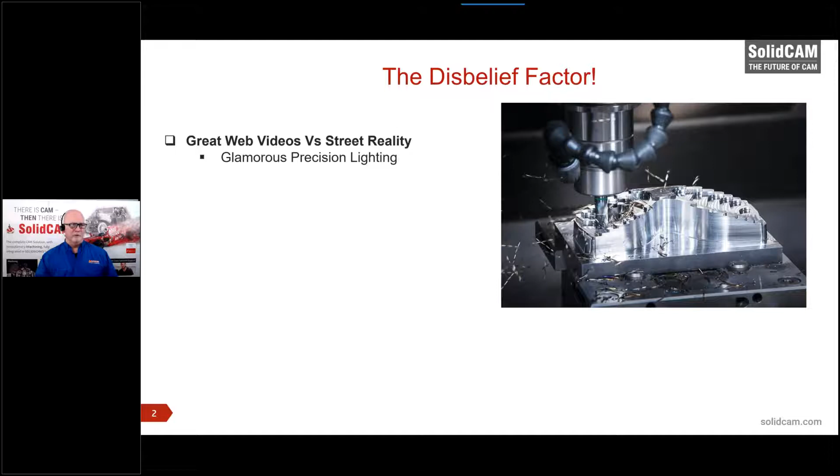Yeah, a little bit, because some of the things that I've seen, just from personal experience at trade shows and being involved in some of our sales presentations, these videos are fantastic. We've got a great team putting them together. I mean, they are some of the most beautiful videos you can imagine, and we run them at all of our trade shows.

We have them up on our big TV screens above our tower and everything. We call them our ambassador videos. The funny part is they've got beautiful lighting, everything is super clean, the parts are shiny, the tools are just absolutely in order.

The interesting part is people are looking at them, and I can't tell you how many times I've walked out and said, so are you seeing something you're interested in up there? And they're like, nah, it's marketing videos, I know it's not for real. Or they look at it and say, anybody can machine aluminum like that. There's just not a heavy belief factor. Some of that really amazes us, the consistency with which people just don't want to believe these videos.

Isn't that kind of what you see, Steve? 100%, Ken. You hit the nail on the head. If we've heard it once, we've heard it 100 times: oh, anybody can do that in aluminum.

And when we tell them that that's stainless steel, there's still that defense. They throw up the defenses, like, well, you probably sped up the video, or you maximized the machine and the rates and feeds and everything else to try to catch my attention.

It's the funny thing, we get accused of marketing. It's like, well, of course we're marketing, but we're marketing for real.

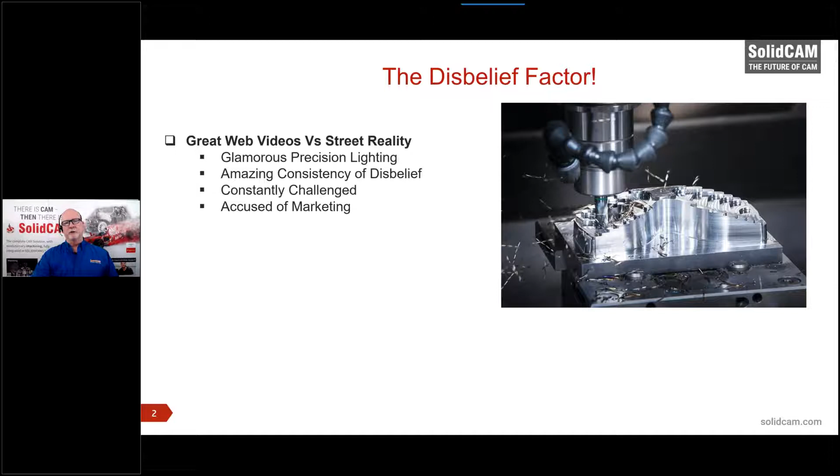But there's something about cell phone videos. There's a lot of different ways to do this, but the cell phone videos don't appear to be staged. Look at the vise in this thing, it's being held down by a couple of bolts and some flat washers. This is the kind of stuff you see in a real shop sometimes.

It's not what I would call good, but these are things that actually show up sometimes. The machine's not real clean, it's a grainy picture. There seems to be a little bit more street credibility.

And Steve, where do we get some of these videos? It's interesting, Ken.

If we're doing a training class, we'll pop out the cell phone video and take them on the fly as we're doing some training. And they really resonate. I'll go back to, hey, it might not be a state-of-the-art machine, but a lot of these customers aren't using state-of-the-art machines. So it really sparks off in their mind that, hey, this could be reality for my shop.

And so when we're talking with a prospect, or dealing with a customer that for whatever reason didn't buy iMachining to begin with, we use these really to help with that disbelief factor. It seems to be a little easier to understand, especially since you got to be careful with ones that you take in the shop.

A lot of times you'll get one from a customer or something like that, and, you know, shop talk - they may be using some expletives, so you might want to watch that before you present it to a new prospect. But you can trim and clip those out. It's pretty funny sometimes, but it's really cool because it's the customer's excitement that really comes across and begins to make things more believable.

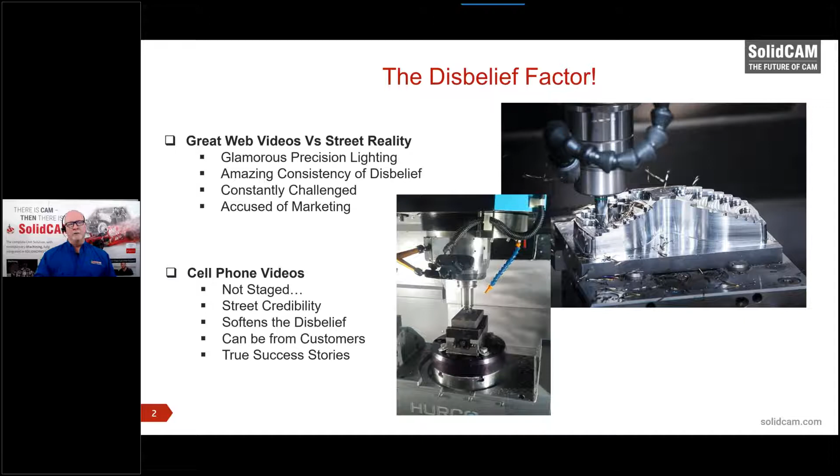So let's talk a little bit about who the customer really is. What is our customer base? Who are we talking to? Are we talking to the board members? Some people think that's the right thing to do sometimes, and those guys probably want to see those stylized videos, right, Steve?

100%. You really have to understand your audience in order to pick and choose the correct videos and marketing material. Time and a place for everything, Ken. Right, exactly. But I think most often, this is the crowd we're talking to: we're talking to the machinists, we're talking to the shop general managers.

This is their environment, okay? Their environment is generally not polished and pristine. So they tend to appreciate when we show them something that's actually real world.

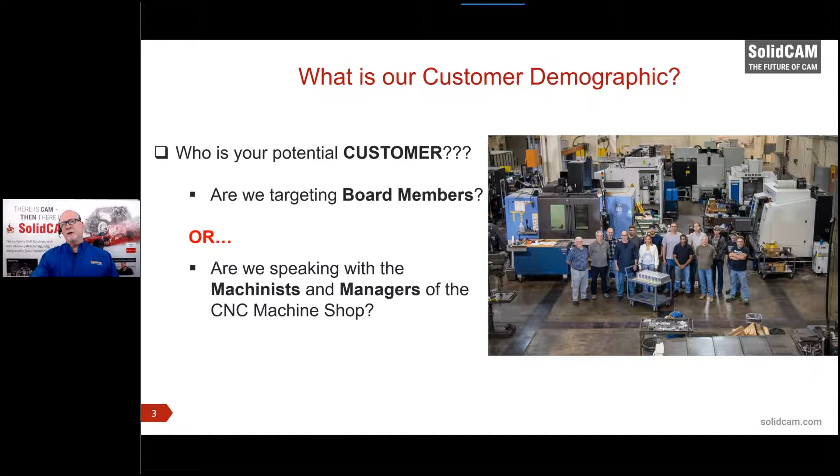And sometimes that means not using something that is super high performance. We have to fight off illusions all the time, and there are some real illusions in this industry when they see all of these videos, all super high performance, powerful machines. One of those illusions is that iMachining requires a super machine. Well, that's just not true.

This video here is one of my favorites. This is not real sexy, but let me tell you what this is. This is a TM2 open bed tool room mill from Haas. This thing is old and tired. This customer is one of our customers out in Denver, and that's where this video came from. We were on site, I was proving this out to him. The pocket you see over there on the left, he machined his way on this machine.

Now, this machine's only got a 4,500 RPM spindle. It can only run about 50 inches a minute before it runs into data saturation. But he's got a 3/8 inch end mill in there. In that pocket on the left, he could only go 50 thousandths deep at 2,200 RPM, 18 inches a minute, before it started just rattling this machine so bad that it would just chip up the tool. So that wasn't very functional for him.

So we did something a little bit different. You'll notice I'm all the way down at a full 1 inch here. Let's go ahead and bring this forward a little bit. You can see the chips being thrown off of this. Now, again, if you watch carefully, you'll see that we're kind of running up against that data saturation. There's still some pausing and hesitation in there, but I'm using everything this machine has got. It's got 4,500 RPM on the spindle, I'm using every bit of it. I've maxed out the chip thickness and the angle such that we're taking advantage of that 50 inches a minute best we can. Again, this is not something we want to show on an ambassador video.

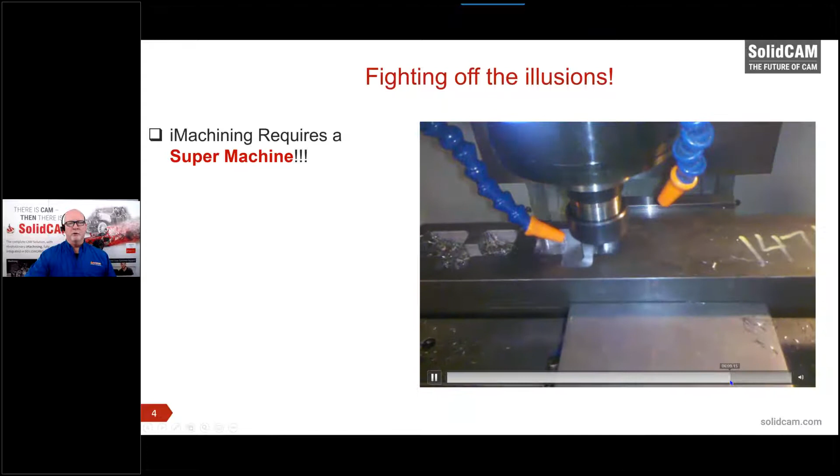But let's take a look at this. Here we are most of the way through it. Look at the chip color, still absolutely gorgeous. Now, something to know, in that pocket on the left, he would get down to the bottom of that pocket in 2 hours and 26 minutes. Remember, we're doing 50 thousandths steps at 2,200 RPM, 18 inches a minute.

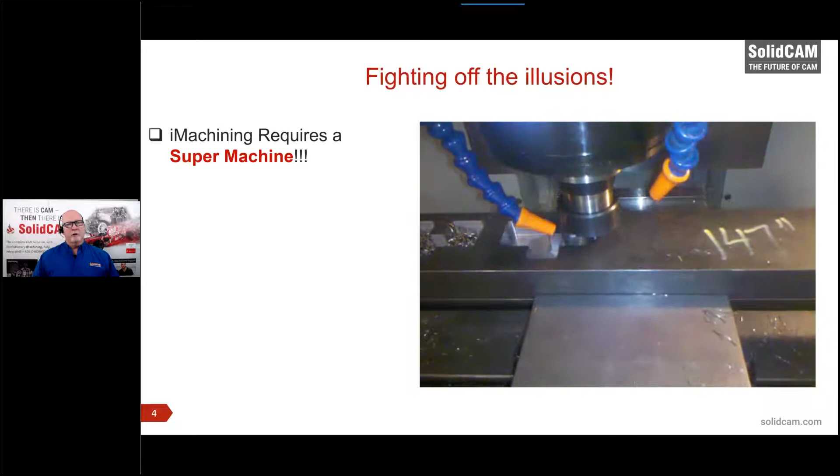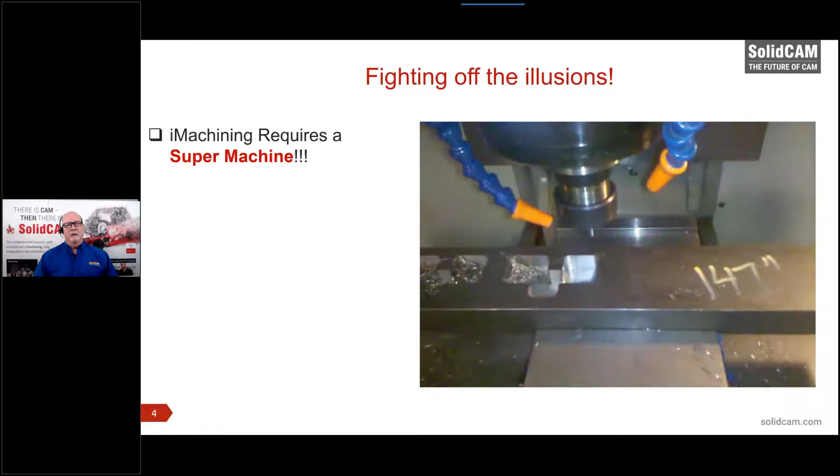So there's 20 steps in this thing to finish it. By the time he got to the bottom, that tool was shot. So he'd put a new tool in, finish the wall off, and he'd use that tool to start the next part. Well, take a look at this. Here we are, finishing up on this at 7 minutes and 25 seconds, and that tool lasted 10 parts. So that was a dramatic difference on an old, beat-up, weak machine that was in need of some service, quite honestly.

Well, Ken, and what we do on the sales side here is explain to customers that we maximize the productivity of each and every machine on the planet. It doesn't matter if it's a 4,500 spindle. Absolutely, 15, 20,000 K spindle for sure, you're going to get even better performance. But at the end of the day, not everybody has state-of-the-art equipment like this gentleman.

Well, and how many times, Steve, have we been talking to a customer about iMachining, and they say, yeah, I've seen your videos, but I don't have any machines like that. I don't have any high-speed machines, I can't use it. Yeah, it comes up all the time. Or maybe there's a machine in the back.

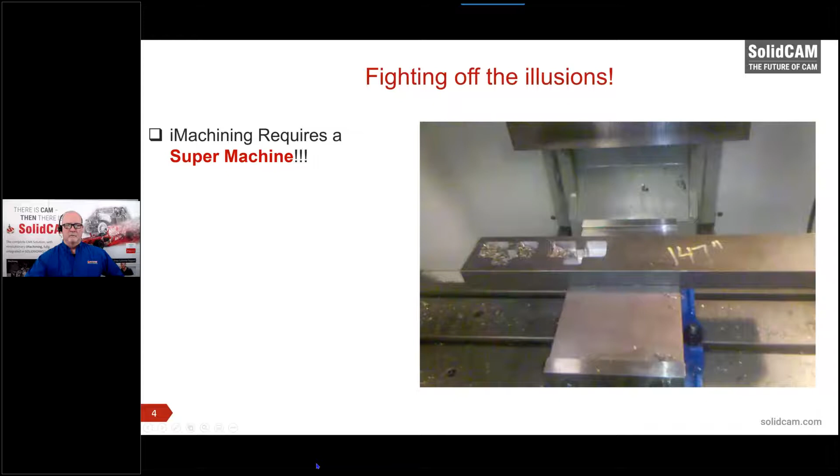Ken, we have had a scenario or multiple scenarios where people were looking at adding equipment to try to keep up with the workload. And we present iMachining to them. It can double, triple, quadruple the productivity of that machine, which makes them not have to buy that brand new machine. Right, so they really might be able to save on some capital investment. I can't stress enough the fact that iMachining maximizes the productivity of every machine on the planet goes a long way, and that resonates with people too.

So, well, another one of those illusions: we have to have super high performance tools to be able to do that. No, it's not true either. This is an AccuPro, an 1/8 inch AccuPro tool, running in a Haas VF2 SS, so it's a mid-range machine. It's got a 12,000 RPM spindle, but that 1/8 inch tool is going 1/4 inch deep in mild steel, and we're taking out an 1¼ inch square pocket out of the corner of this thing.

Now this is using their machine, and watch how this thing takes care of this business right here. We're really deep for that 1/8 inch tool, and this is just an AccuPro off the MSC catalog, one of the least expensive tools on the market. Look at the performance we're getting out of this thing.

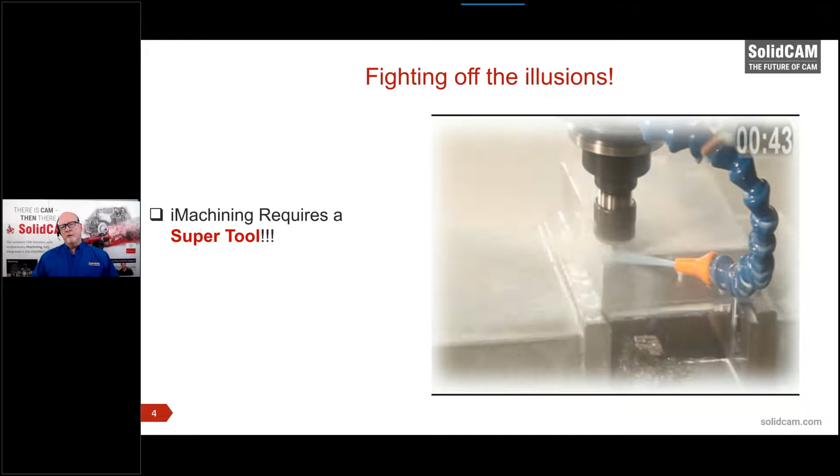It's absolutely stunning. Videos like this really meet the end user where they need to be. They go, yeah, I can do that on my machine with the tooling that I buy. A lot of times customers are used to buying big, huge end mills and trying to plow through the material. We get a lot of traction because of the intelligence of iMachining. Hey, Mr. Prospect, you can buy smaller, less expensive tools and get better results because of the way the intelligence built into iMachining manages that tool's engagement in the material at all times. So that seems to set off a light bulb in their head too - hey, I can buy smaller tools, get better results, and it's a win-win all the way around.

Absolutely. And another of those illusions we run into all the time comes right in there with that - the horsepower requirements. This is where we can really turn something upside down for these customers. It changes their entire mentality.

Most of you have probably seen this video. It's one of our favorite ones. We take this machine to trade shows with us sometimes. This is a little LaVille LMV 300 machine. That's only a 3.5 horsepower spindle on there. And we're in 1018 cold roll steel at 3/8 of an inch deep on a 3/16 inch diameter tool, so 2 times diameter deep again.

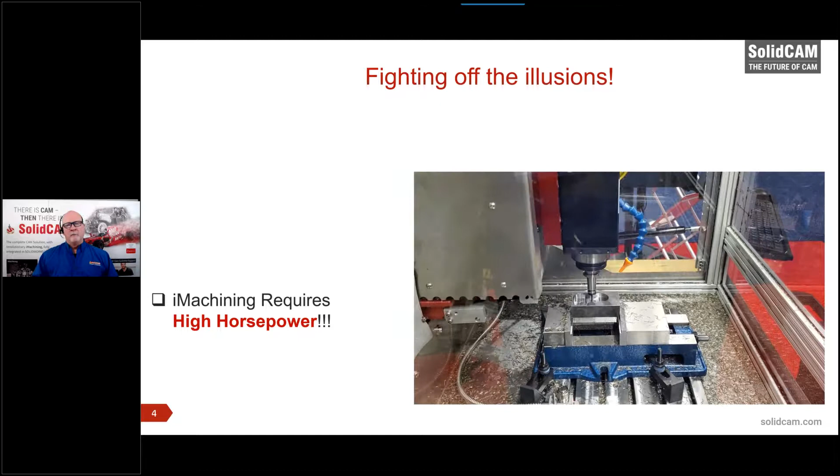But look at how, on this little bitty desktop machine with a low horsepower spindle - it's a fast one, we're running at 18,000 RPM right now - we're able to cut amazing with this. And we use this at trade shows to really bring that sense of reality to people.

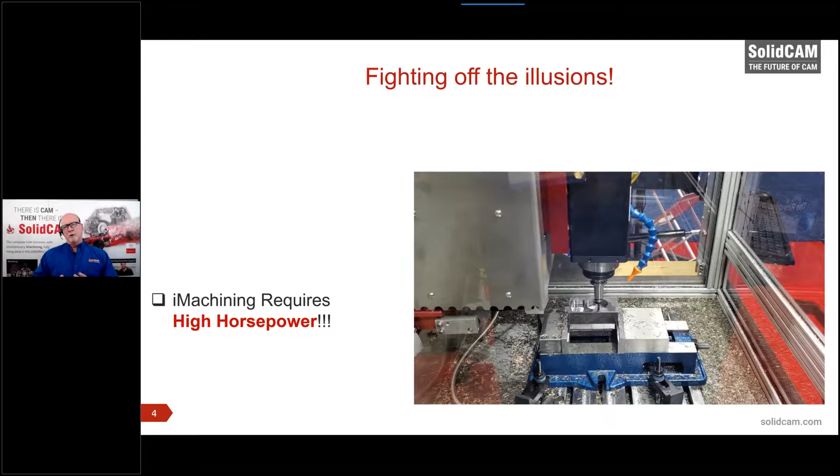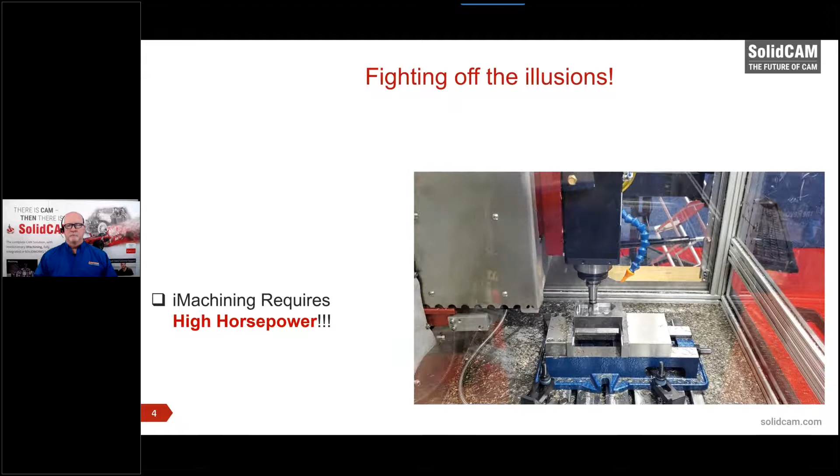Now, one of the things that's kind of always brought up is, well, yeah, but what about the customers that do have high performance machines? Steve, what do we run into with that? Well, being able to look at a machine like this, the light bulb goes off in their heads - holy cow, if I could get that type of productivity off of a small machine, imagine what I could do with my state-of-the-art gear. Exactly.

I was just going to say, this gives us a reason why we use a lot of these cell phone videos. This was at the trade show. We were setting up, and I just pulled my phone out and took a video of this as we were running it. It's not super fancy, but it's real. You can hear the sound of the cut, you can see the chips flying everywhere, and they get the sense of what's going on. Even being able to see outside and see, oh my gosh, this thing's sitting on carpet. Holy cow, you know?

Yeah, I was just going to say, Ken, I think there was a story about IMTS 2018. I can't remember if it was on the old machine we have, the retrofitted machine, or if it was on this one. But I know which one you're talking about. That was actually this machine. That was pretty interesting, guys. This is something that was kind of fun.

I was standing out in the aisle, and a group of guys came walking by. I could see who was the leader - it was obvious he was the alpha dog. So as he came by, I said, 'Hey, how you doing? You guys do any CNC machining?' And he looks over at me, looks up at our monitors and sees what we're doing up there. He goes, 'Yeah, we've got MasterCAM. We've had it for years. We don't need to see anything like you've got here.'

I go, 'Well, have you seen our iMachining?' They go, 'We got dynamic mill. It's the same thing.' I said, 'Well, no, it's not really the same thing.' And he's trying to walk away the whole time. I said, 'Could you give me just a little bit of time to show you what's different about it?' His comment was, 'No, I don't have any time. We're busy.' And he started to walk away. And I said, 'Come on, man, can you give me a minute and a half? That's all I'm asking for. A minute and a half, you can walk away.'

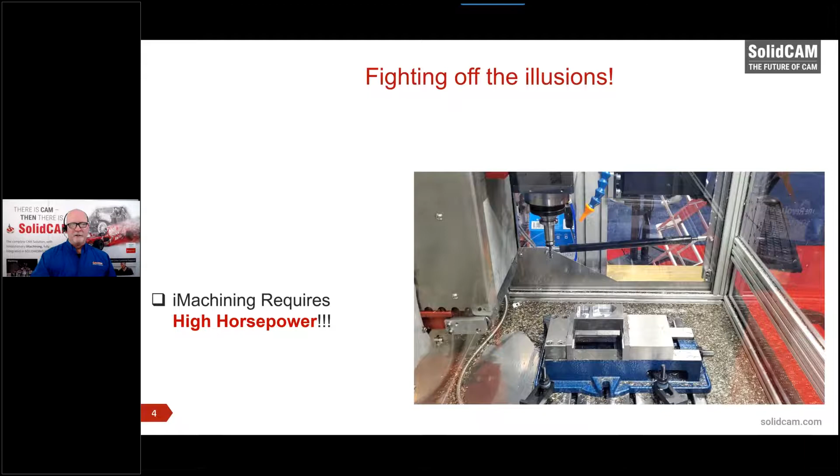Exactly. And now, Steve's got that silky smooth voice, and he's got that mannerism that just really draws people in. So I like it when he talks about this stuff here. So yeah.

Smoothness of the machine is one of the trademarks of iMachining, everyone. And if you haven't run a toolpath, I love the fact, Ken, when you're running a toolpath, you'll kind of lean against the machine and feel what is going on with the machine. And I think you do get questions. It's like, hey, what are you doing leaning on the machine? And all of a sudden, then they're curious.

When you're leaning on the machine, because of the technology behind iMachining, one of the big misconceptions is, oh yeah, great, I'm going to go 90 miles an hour, but I'm going to beat the heck out of my machine. Nothing could be further from the truth. Because of the technology, the way we manage that tool's engagement in the material, we're actually extending the life of the machine versus beating it up like our other friendly competitors do.

It's been kind of fun several times. I've been standing by the machine, and as soon as I start it, the guy who's going to be the decision maker immediately walks over and sticks his shoulder against the machine, leans in. And it's like, I know immediately, okay, this guy really knows what he's doing here. He knows what he's listening to the sound of the cut. A lot of times they'll close their eyes and just listen. And they'll watch it sometimes.

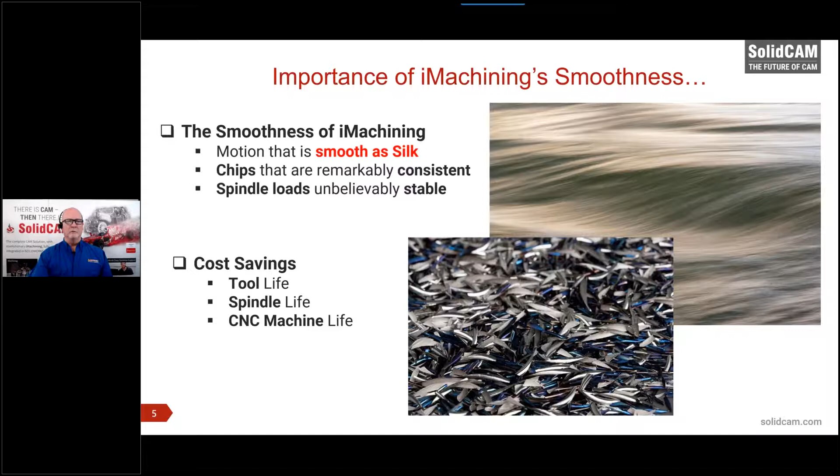Exactly. Now, Steve, we also hear this, right? Yeah, but it's got to be super hard to program.

What we're seeing over here in the States and Canada is that finding programmers is a challenge for these shops. I always like to present it this way, Ken: iMachining is our gift to you, because really, in order to get a tool path that's even close to as effective as iMachining, you'd have to have 20, 30 years experience in this industry to know feed, speed, step down, step overs. You got to have a ton of knowledge. With iMachining, the programming and all the difficulty of programming and roughing is taken out of the equation. I like to present it as an algorithm that we developed and patented, and that algorithm helps you become a 20, 30-year experienced machinist right out of the gate.

So you're getting parts immediately with the optimal cycle time. I can't tell you how many times I've talked to somebody, oh, see what you can do on this part, and we're getting a cycle time of 2 minutes, and we pop up iMachining and we're right in that ballpark. And let me ask you this, how long did it take you to get to that cycle time? If they're honest, they're saying, well, we've been tweaking on that part for about 6 months to get there. With iMachining, boom, you're there right out of the gate. So ease of programming is another huge benefit of iMachining.

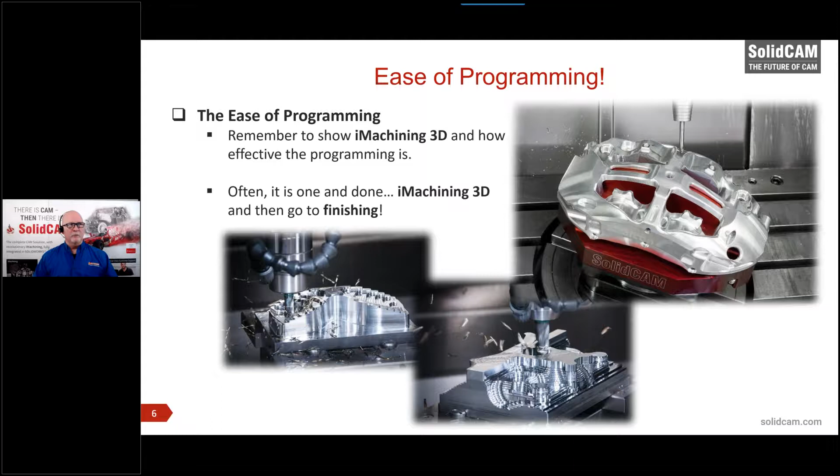So pretty powerful stuff. So how do we demonstrate? Steve, you're the master in this. Tell us, what's the game plan here?

You know, really, I'll kind of go back to what we kicked it off with. A lot of times these guys have seen highly stylized presentations, you know, we call it the dog and pony show, Ken. I think really at the end of the day, it's who's the dog and who's the pony? Well, exactly.

So we do like to start out with maybe not the highly polished videos, showing them reality. That's going to resonate with the guy that has the older equipment. Like Ken said earlier too, it's going to resonate with the guy that has state-of-the-art equipment, because he's looking at that going, holy cow, if they can get that performance out of that old dog, imagine what I could do.

So, absolutely. Yeah. And one of the key things, guys, this is something that works over here really, really well. And Steve is very good at this: stay casual. If you can create an environment where the customer is very comfortable talking to you, you begin to build that relationship with that customer from the very moment you start talking with them.

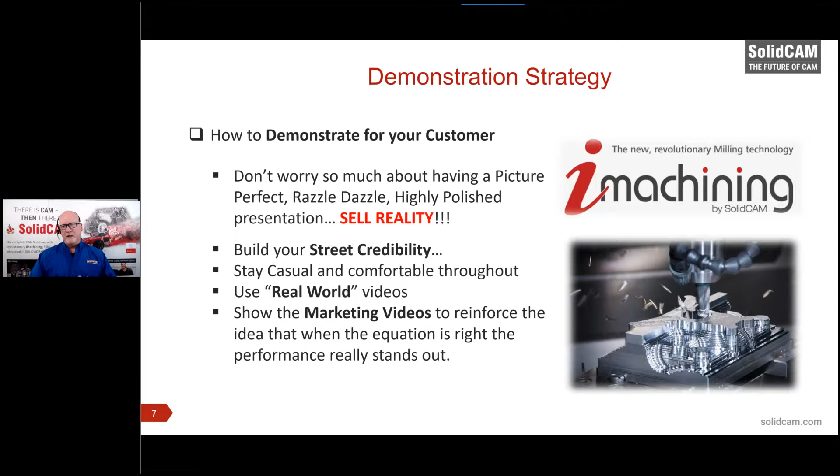We wanted to take you to that area. Inspire your customers. If you can get them excited and show them that the investment is worth what it's going to do for them, highly worth it, then we don't have a problem getting people to buy iMachining. It's kind of a no-brainer. 100%, Ken.

I haven't sold iMachining with every account. Sometimes there's just so much financial pressure that it doesn't allow it, so something's better than nothing. You want to get SolidCAM in the door. We can't always justify it, or they didn't see the light, but they saw the value in SolidCAM as a whole and bought a package without iMachining.

Interesting story I'll share quickly. We had SolidCAM into a school, and the manager of the shop was running into money pressure—it's a school, they didn't have a lot of money. He was going to bust out on his own and start his own machine shop. He said, Steve, could you help me out? I'd like to get going with SolidCAM in my shop. I'm just in the process of putting together the finances to make it all happen. Can you help me out with software in the short term?